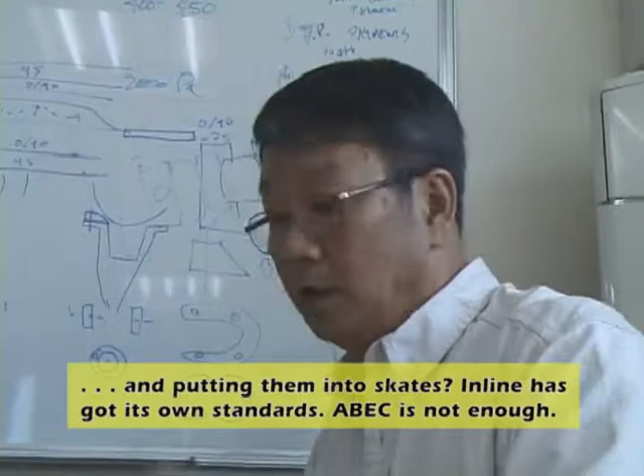ABEC, this word is not quite reliable. Why are we still just using ABEC grading bearing and putting it into inline? Inline has got their own standard. ABEC is not enough. Our concern, our requirement, our spec is way far beyond the ABEC.

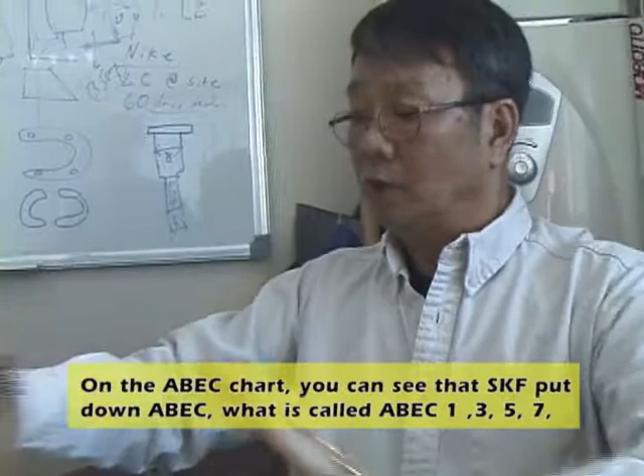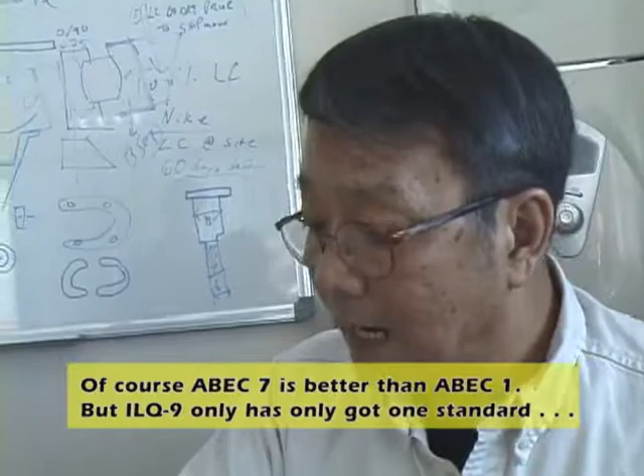Because we're concerned about the clearance, the design, the material, right. Not just only accuracy. The ABEC chart, you can see SKF put down the ABEC - what is called ABEC 1, 3, 5, 7, and all the numbers that nobody can understand. Of course ABEC 7 is better than ABEC 1, but ILQ 9 has only got one standard - the best standard. There you go. No comparison. Low margin for error.

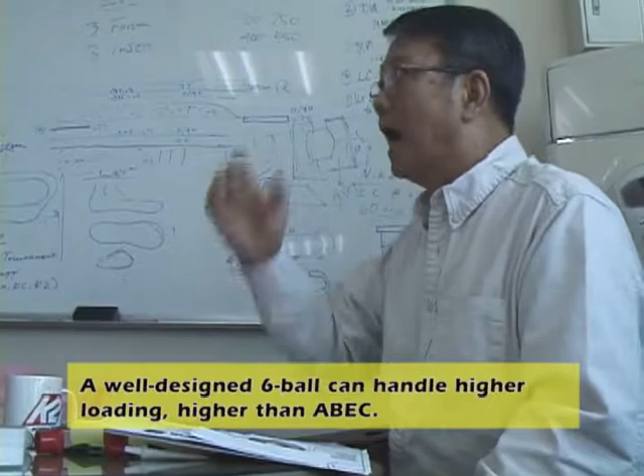A good designed 6-ball can handle higher loading, higher than ABEC. The bearing ball got a different raceway, can provide even less friction. Less friction, that means more free spin. You believe it, you buy it.

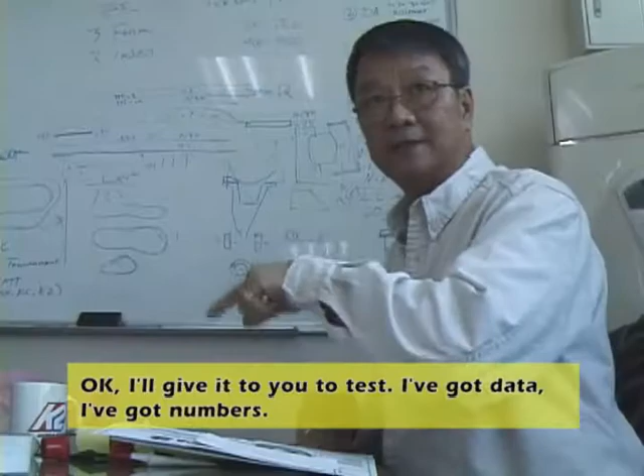You want to test it? Okay, I give it to test. I got data, I got numbers. Material, what's being used - ABEC didn't mention about that. That's why in the whole market, it's getting more and more, getting down on all the materials. You understand what I mean?

Nowadays, you know that some of the bearings have a chrome steel outer ring, carbon steel inner ring. There's nothing governed, no rule. If you are interested, take some time to go buy some other brand name skate, take out the bearing, check it out, go to the lab to test it, give it a result.

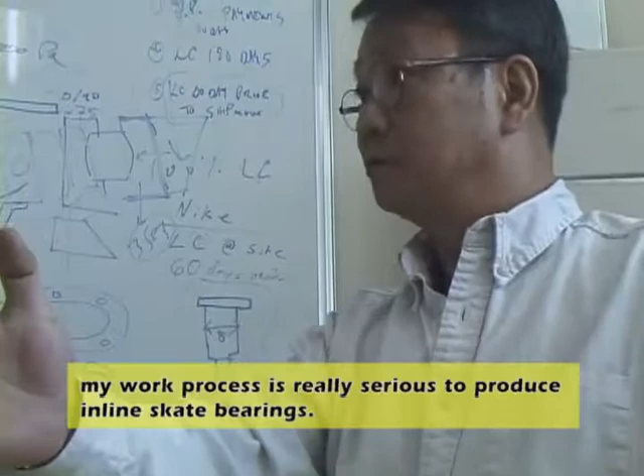I think a lot of consumers will be shocked about that - 99% of the bearings come from China. I think Twincam is the only one to show you my work process is really serious to produce inline skate bearings. If you go compare with some other people, you'll be scared.

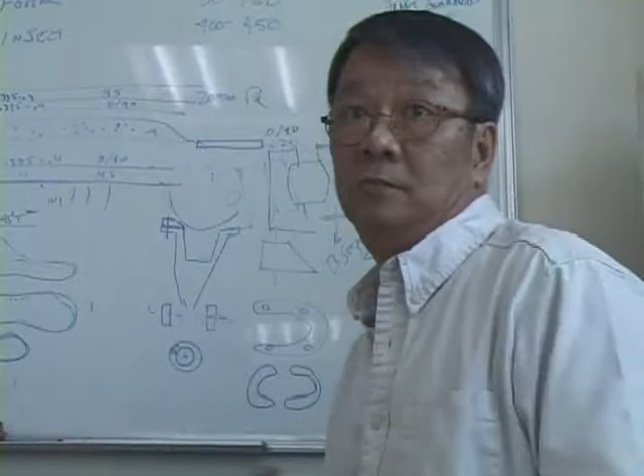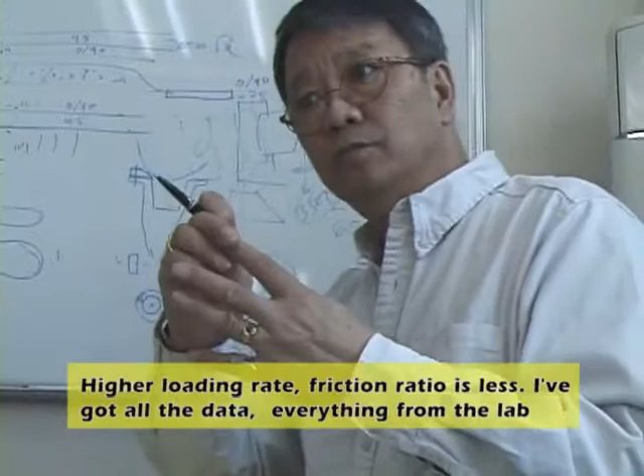Don't you think so? Data is in there. I got a lot of data, technical data. 6-ball is very difficult to design. Higher loading rate, friction ratio is less.

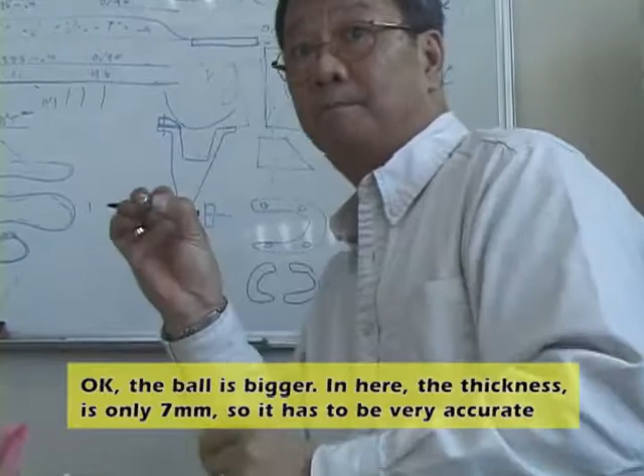I got all the data, I got everything from the lab. Okay, the ball is bigger. In here, in the thickness, it's only 7 mm. So it's very, very accurate to put the 4.5 mm steel ball inside. Standard 7-ball is 3.969. All in here - I also got the data in here that you can put into the CD.

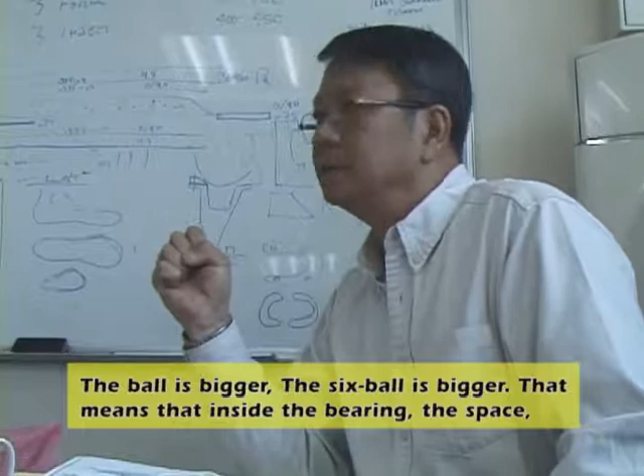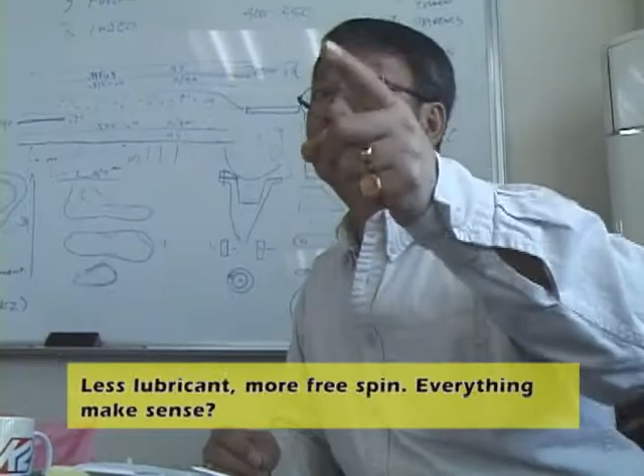The ball is bigger - the 6-ball is bigger. That means inside the bearing, the space, the volume is less than the 7 steel ball design. We can put less lubricant inside. Less lubricant, more free spin. Everything makes sense - 6 balls, on the other side, provides better free spin and loading.

In 2 years, 3 years experience, OEM didn't pick 8-ball bearings. A year ago, I talked with my engineer. I asked them why people doesn't like 8-ball, and they say that 8-ball is not that good. Then I say, okay, what about 6 balls?

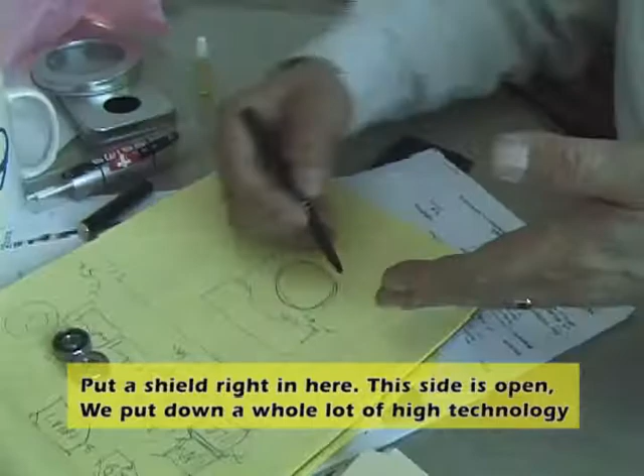I said, try. We're using a thinner retainer. The retainer, the steel is thinner to save space to fit the 4.5 mm steel ball, put it into the 608 bearing. If put a shield in here, this one, this side is open. We put down a whole lot of high technology into ILQ.

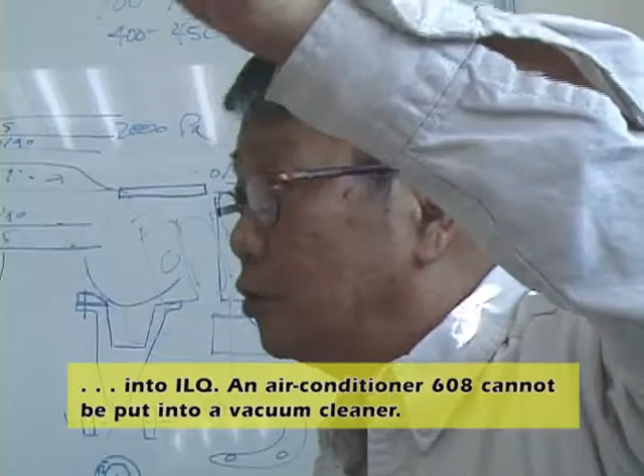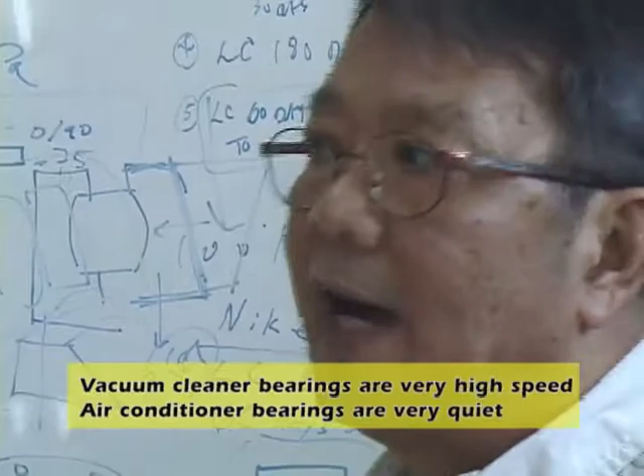An air conditioning 608 bearing cannot be put into a vacuum cleaner. The reason is that 2 different applications have 2 different requirements. Vacuum cleaner - very high speed. Air conditioned bearing - very quiet. Same 608, so we need to have 2 different designs.

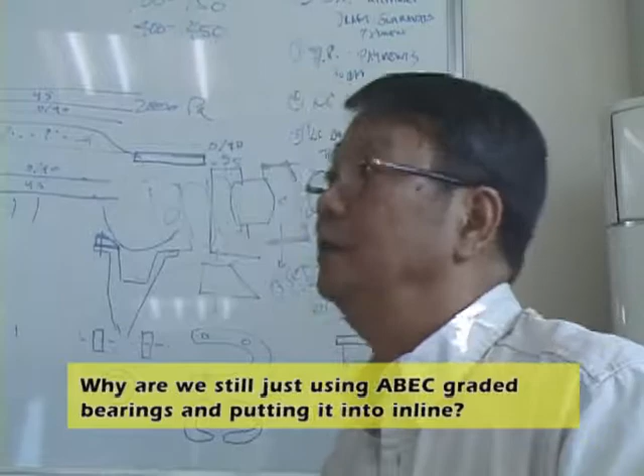Why are we still just using ABEC grading bearing and putting it into inline? Inline has got their own standard. This is my standard, this is the inline standard. Tom and I make the inline standard. It's a new rule. Why?

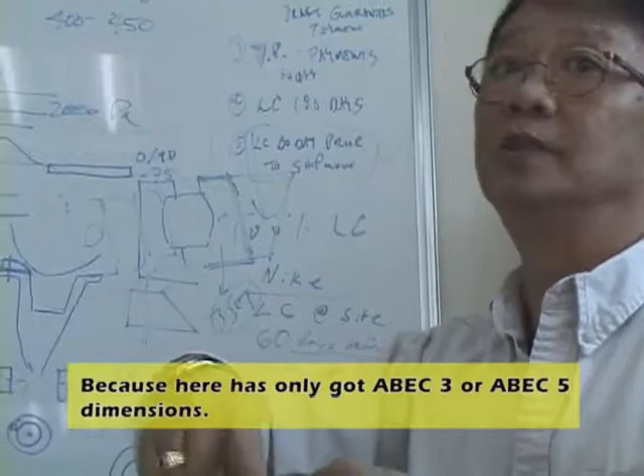All the market is using ABEC 7 bearing. I mean the ABEC 7 grading has got no use because here it's only got ABEC 3 or ABEC 5 dimension. If I put the ABEC 7 dimension into an ABEC 1 hub, it's got no use.

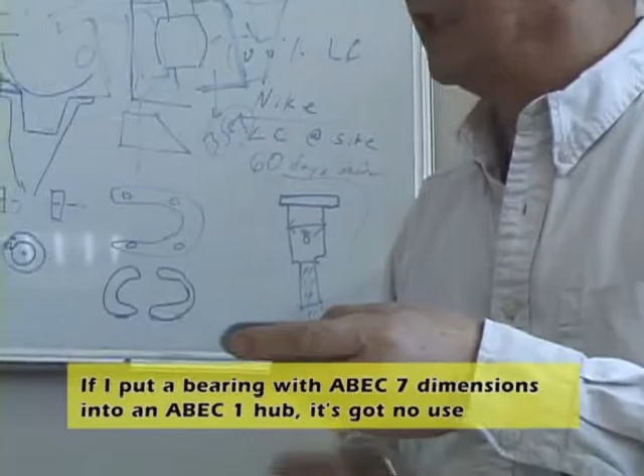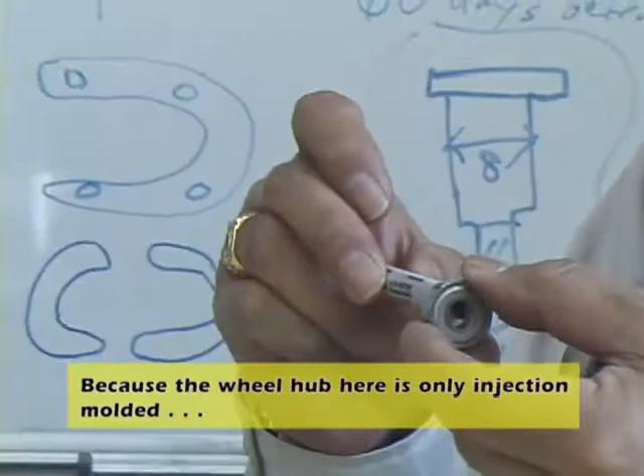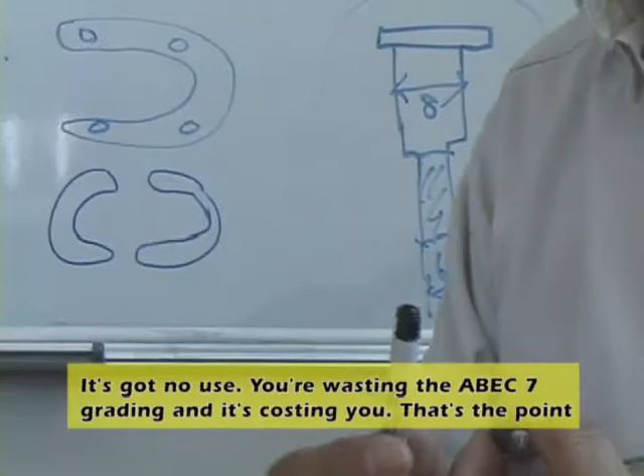You pay for ABEC 7 outer ring, but you're only using ABEC 1 tolerance in here, because this one is only injection molding. If this one is only ABEC 1 grading or non-grading, you've got no use putting it in. You're wasting the ABEC 7 grading cost. That's the point. Any question?

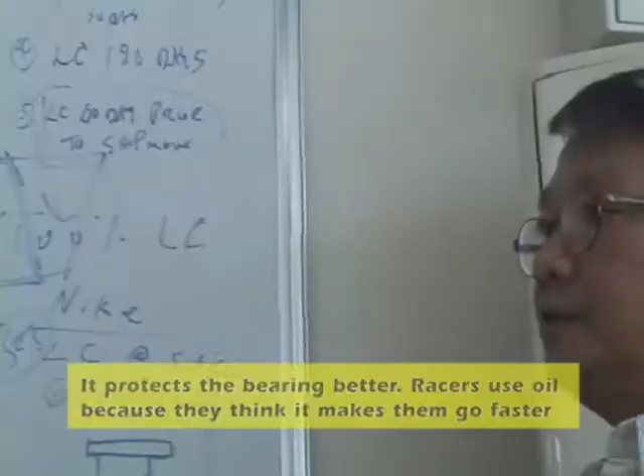Talk about grease. OEM using grease because it's a little bit thicker, I mean it protects the bearing better. The racer uses oil because they think it's faster. What? Oil plus thickener makes grease. There are thousands of different agents or different materials you put into the oil to make a grease.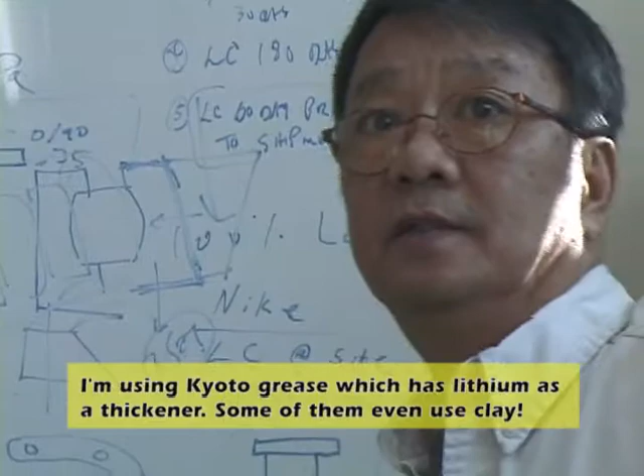I'm using the Kyoto grease, it's using lithium as a thickener. Some of them use clay, even clay, as a thickener. Mobil oil, some of the people. Thickeners depend on your application, on what we put it into, like a very heavy machine. Lithium is very good, it can handle very high, heavy loading.

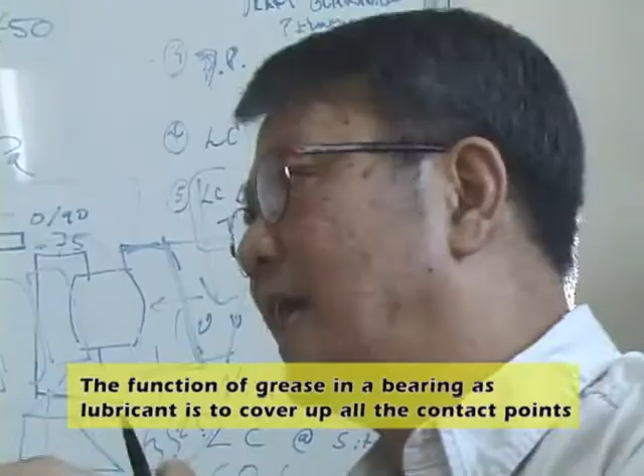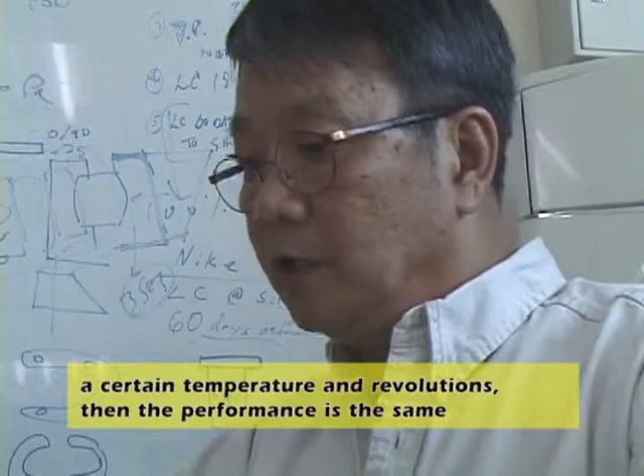The most important function that grease serves is as lubricant, to cover up all the contact points. The function of the grease is also to try to bring out the heat. If you put the grease with the same oil, same chemistry, we keep using it until a certain temperature and revolution, the performance is the same.

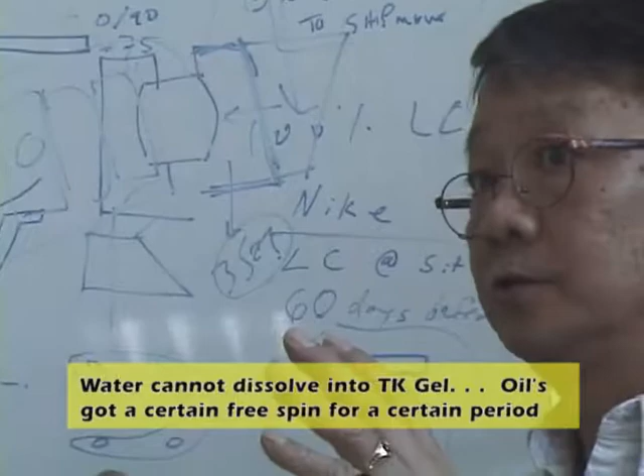TK gel is absolutely water repellent. I make the TK gel myself. Water cannot dissolve into TK gel. Oil still has a certain free spin for a certain period, but it dries out. Lithium, the thickener, is still holding up the oil.

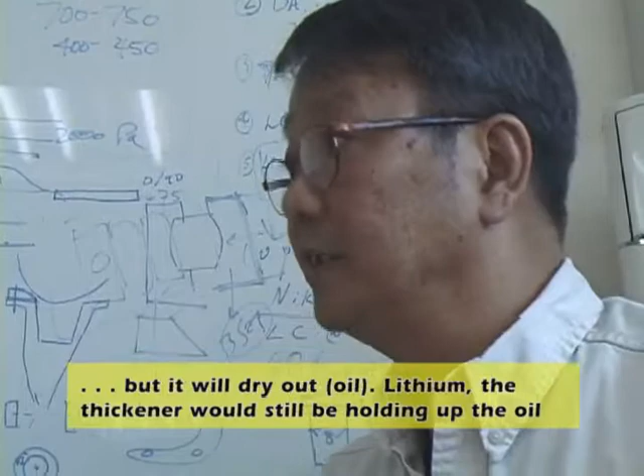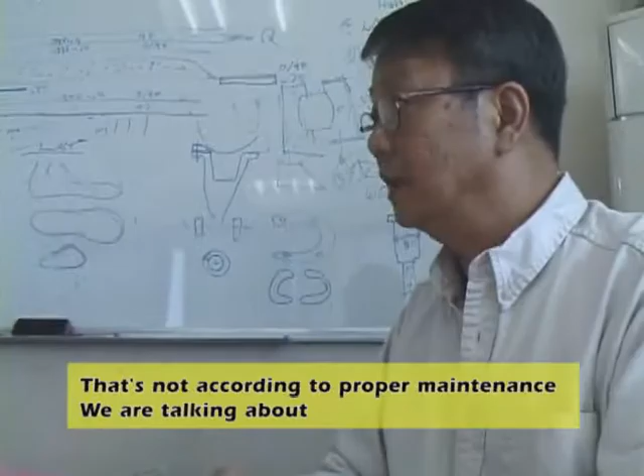You can buy a car, a BMW, without putting any engine oil. You can still run it for a certain period, not according to proper maintenance. We are talking about how to maintain the bearing and provide the bearing with the very best performance.

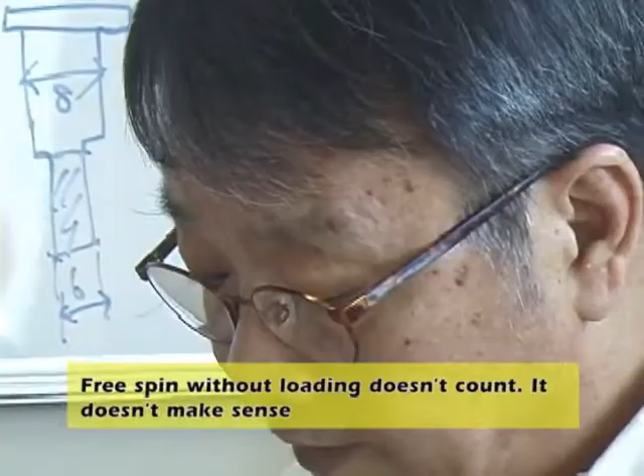Free spin without loading doesn't count. It doesn't make sense, it's not fair for the consumer to spin the wheel to check if it's a good bearing or not. Very wrong. It means nothing, because once the bearing is put into the wheel, if everything is not compatible - the wheel, the spacer, the frame, the bearing inside misaligned - then the bearings cannot spin.

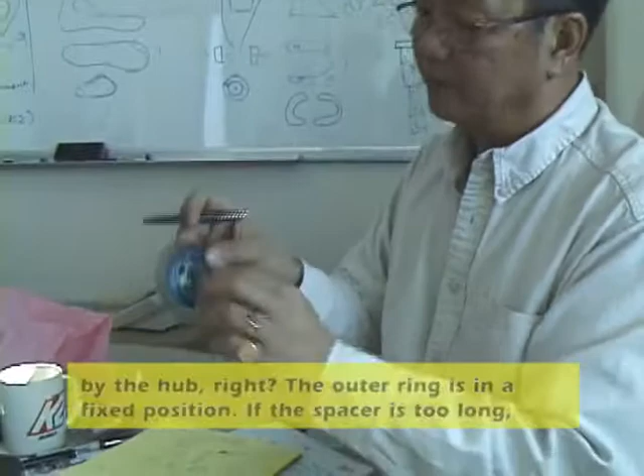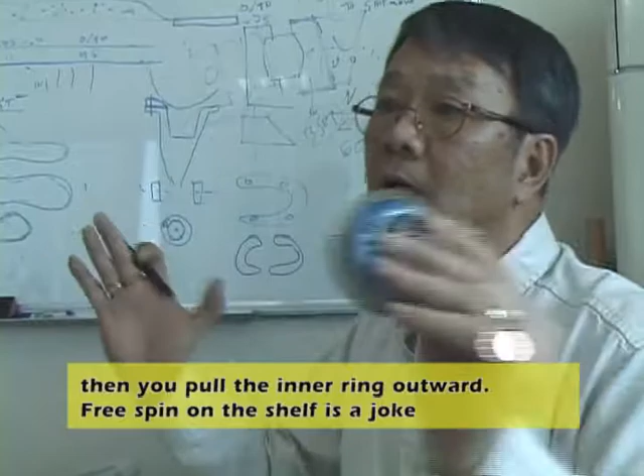That means the outer ring is governed by the hub, right? The outer ring is at a fixed position. If the spacers are longer, then you pull the inner ring outward. Free spin on the shelf is a joke.

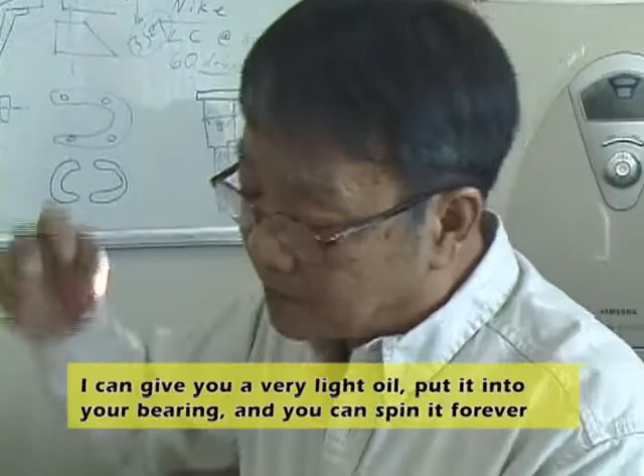All the salesmen tell you, oh see how smooth it spins on the shelf. It's not fair. I can give you very light oil, put it into your bearing, and then you can spin forever. Everybody knows that, all the buyers, everybody knows that. Free spin doesn't count, but what about all the consumers, all the little kids?

I designed the first undercut bearing for Nike. Here is the undercut - right here, the L, like an L shape. Oh okay, that's undercut, this is a little bit smaller, the interface with the bearing. See how there's a step there.

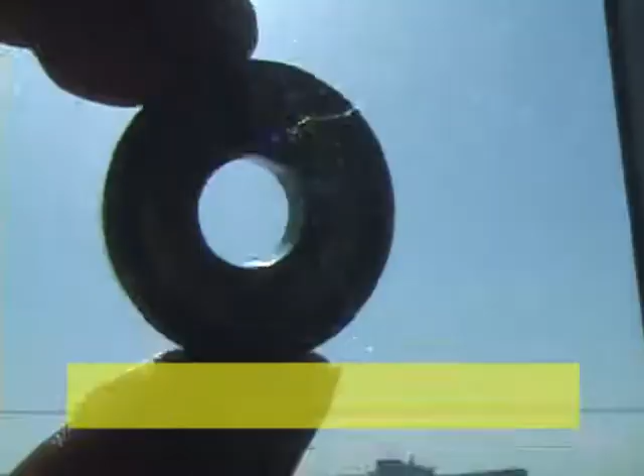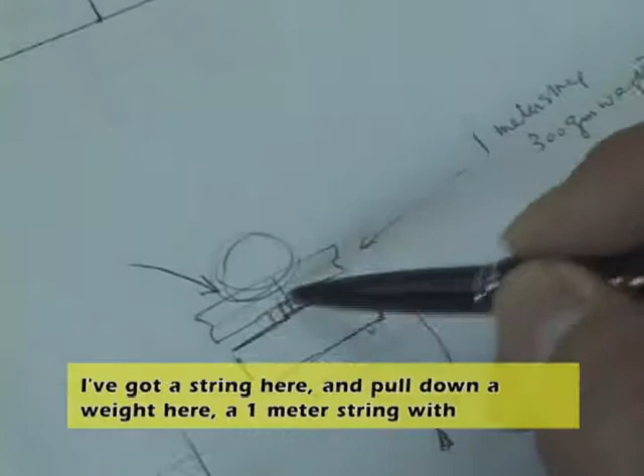It's impossible to see light through any of Tom's bearings. I've got a free spin machine in my factory, I test every single bearing. I have a string here, and pull down a weight with it - 1 meter string with a 300 gram weight. Then I let the bearing free spin until it stops.

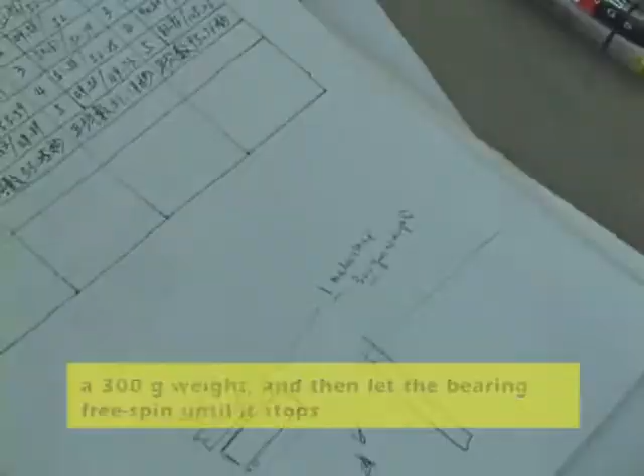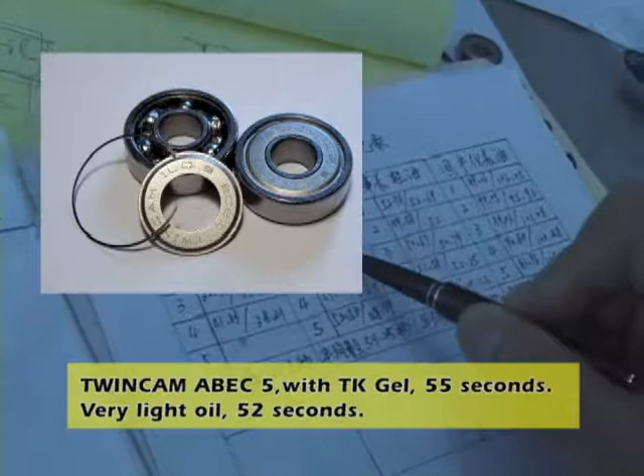Let me show you the free spin test report. The ABEC 5 average is 37 seconds. Twincam TK gel, 55 seconds. Very light oil, 52 seconds. My racing oil bearing, 105 seconds. Case closed.